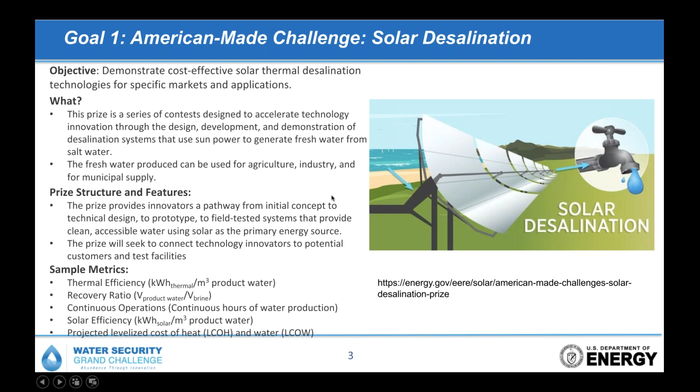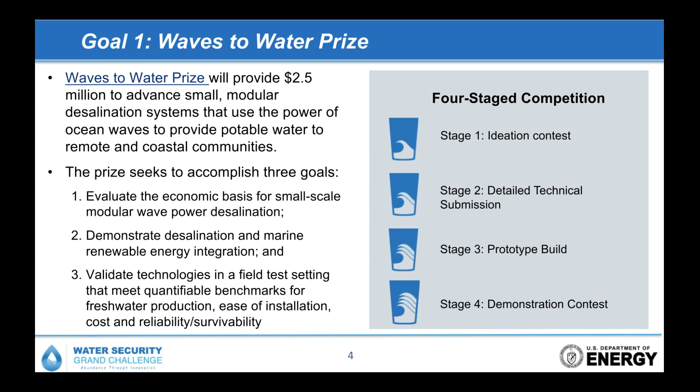Next slide, please. And now I'm going to hand it over to John, who will talk in more detail about Goal 5.

Good morning, everyone. Afternoon and evening, I guess - I think we have participants from all around the globe today. My name is John Carmack. I work with Diana on the Water Security Grand Challenge, and my responsibility is as the lead for Goal 5, which is to deploy small modular energy water systems in cost-effective areas to serve areas where energy and/or clean water is scarce, expensive, or challenging to obtain.

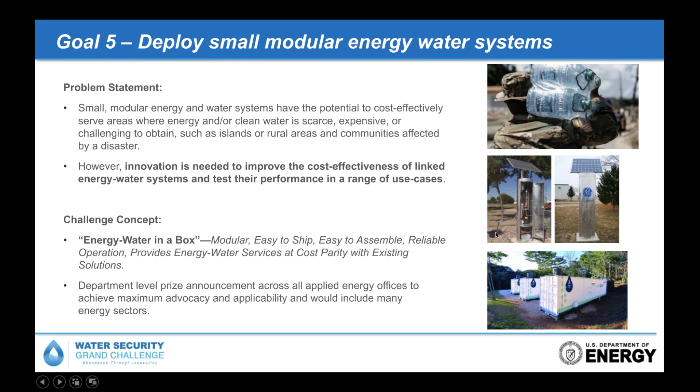In the Department of Energy, we've been trying to focus on how to establish a prize opportunity that is applicable to all energy supply capabilities, as well as applicable to a number of different water purification applications. Next slide, please.

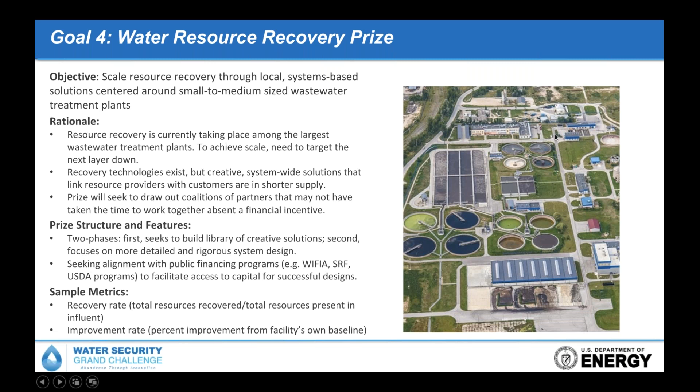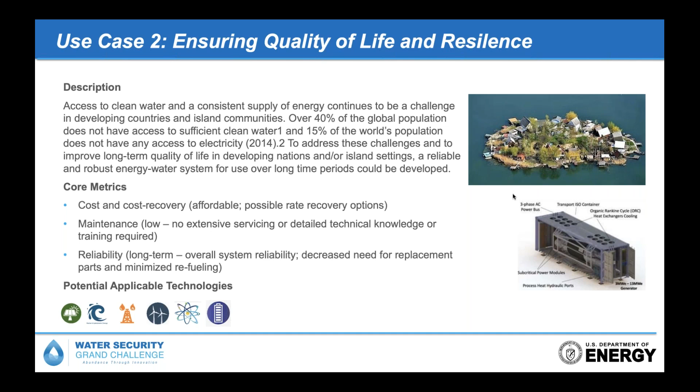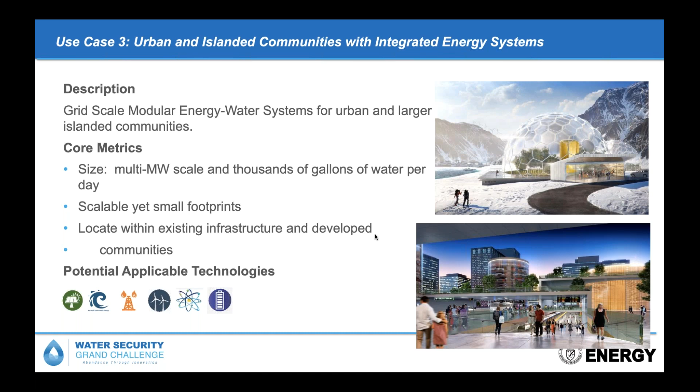We think all 3 of these use cases have definite possibilities for some of the new and advanced nuclear technologies currently under development around the globe. So what we're actually trying to do is identify prize opportunities that cross across all of these use cases, and develop a prize opportunity that breaks down the cost and barriers to having these types of technologies available to communities around the globe.

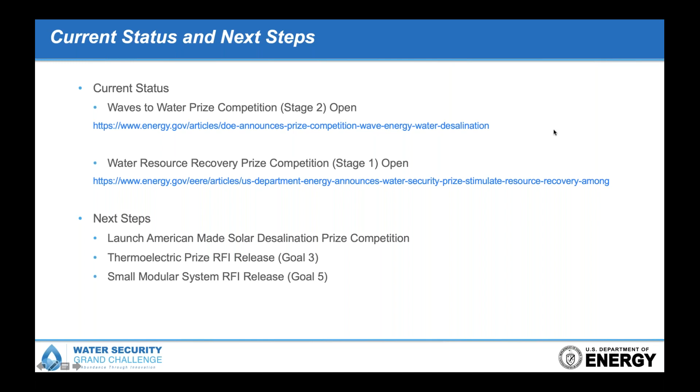I understand that today's theme of the webinar is energy, water nexus, can nuclear technologies build water security? To start with, all I can say is that by this time, we all have come to know that nuclear energy plays a key role towards the supply of clean and green energy, not only as electricity, but also with added value in terms of desalinated water and hydrogen.

BARC India has long-term experience on desalination, with a decade of experience and expertise on nuclear desalination. BARC is also associated with the International Atomic Energy Agency in the field of nuclear desalination and plays an active advisory role. In today's presentation, I will present the role of nuclear energy for desalination and the activities and initiatives undertaken on nuclear desalination in our country, India.

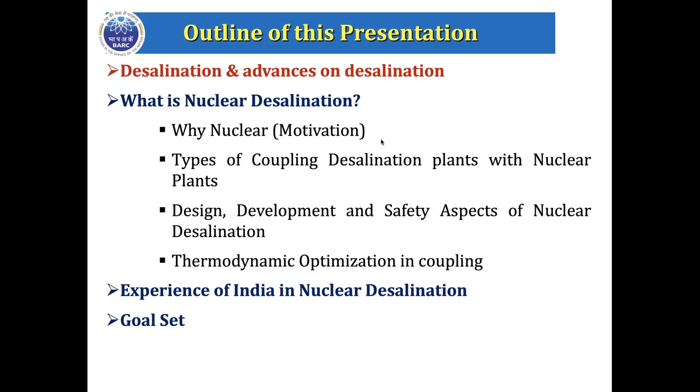Now, when we do nuclear desalination, we need to do some thermodynamic optimization for coupling the system. Then I'll share my experiences of nuclear desalination being carried out in India. And ultimately, we have set some goals for this desalination. Next slide, please.

Now to start with desalination, we understand that there is a solution for this water scarcity. We know desalination is a process which can separate the salt from salt water or saline water. It can produce various quantities and qualities of water, starting from industrial quality water to drinking water. Now to do this desalination, we need some energies, either electrical or thermal, for the present day desalination processes.

This energy can be of various sources, either from nuclear power reactors or thermal power reactors, or maybe from renewable energy sources. Now a desalination system can give very good quality water, but at the same time it rejects very highly concentrated saline water. If it's a thermal desalination plant, it will have some temperature which will pollute the seawater environment, and the concentrated water also will give some ecological imbalances towards the sea.

So we have to see in a holistic manner how we can do the total desalination with the objective of optimization of energy as well as the total system, with various considerations, at a minimum water cost. Next slide, please.

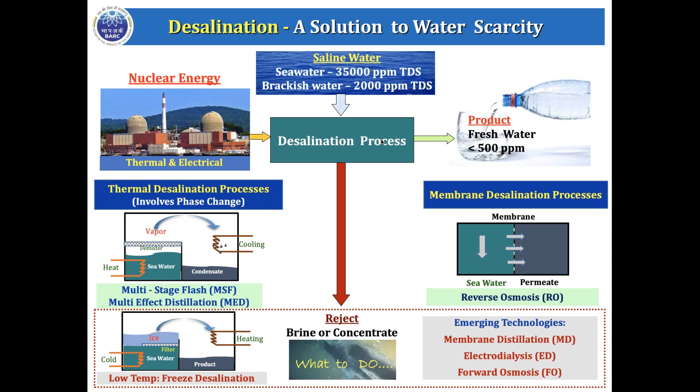Now, present day technologies which are mostly used for desalination are well-established. Those are called multi-stage flash desalination as well as membrane desalination. The desalination technologies have shown continuous progress with respect to their performances, material of construction, as well as efficiencies of individual systems.

For a thermal desalination system, the advances include high gain output ratio, and for a compact system, one should obtain a high heat transfer coefficient. At the same time, overall construction cost should be minimized, so cheaper materials of construction are available nowadays. Sometimes exotic material is used with respect to corrosion, and thin material is used so that overall weight is reduced, and overall cost can be reduced.

Coming to the membrane processes, for the seawater reverse osmosis case, membranes are available with respect to high salt rejection efficiency. Better membranes are available with respect to high chlorine tolerance. Membrane lives are extended, pre-treatment conditions are better, and energy recovery devices are used, which can reduce overall energy consumption.

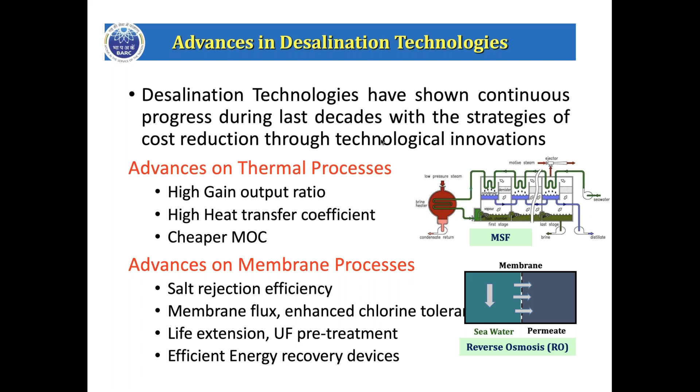Now, why do we go for nuclear energy for desalination? The motivation we got is that our main objective is to reduce overall energy consumption as well as the total cost of production. As you know, desalination is an energy intensive process.

It needs steam or electricity. These are the two forms of energy required for a present day desalination system.

There are other energies available like fossil fuel power reactors and renewable energy sources. But as we know, renewable energy sources are not stable energy sources; they have some limitations which are intermittent in supply. And fossil fuel reserves are limited. We should preserve them for our future use, like transport and petrochemical industries. There are issues with fossil fuel sources, as we all know, such as greenhouse gases which create global warming and do not give carbon-free electricity.

Now, the fossil fuel energy costs are becoming higher and higher because of adding various impacts of other costs, which are quantified in terms of human mortality, morbidity, global warming, and damages to ecosystem.

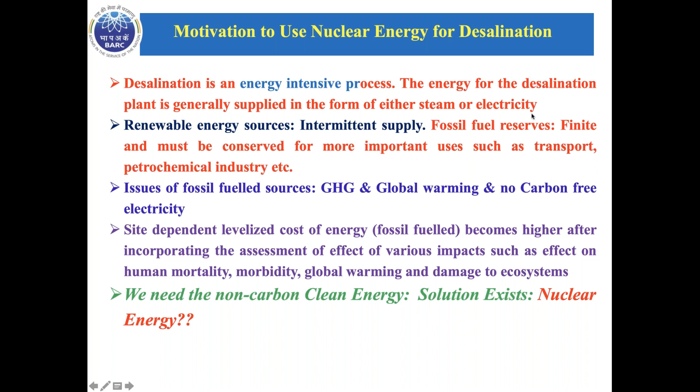Now, nuclear desalination is an application of non-electric nuclear energy application. Now, what is nuclear desalination? It is when a desalination plant is using power from a nuclear power reactor and producing fresh water from seawater.

Why do we go for nuclear desalination? Nuclear desalination can meet the challenges of increasing global demand for water and energy. It can reduce concern about climate change and volatile fossil fuel prices. Nuclear desalination can give security of energy and water supply. Now, how to do it? With the use of steam and electricity.

There are thermal driven processes and membrane driven processes. Electricity driven membrane processes are generally cheaper than thermal processes, but membrane driven processes produce lower quality water and are very sensitive to the quality of feed water given to the system. Thermal desalination plants produce very high pure distilled water, which can also be used for process water and industrial water.

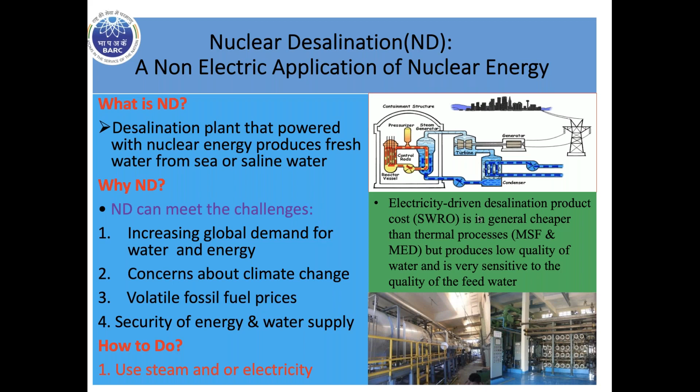Go to the next slide, please.

Now, how to do this nuclear desalination for a heat-driven system? As you all know, a nuclear power plant has some concerns over radioactivity. This can be avoided by giving a coupling barrier in such a way that radioactivity cannot go to the desalination plant side. When the desalination plant uses this energy in the form of steam, there are some problems of activities, mainly tritium, which is a beta active isotope, that can mix with the desalinated water. So there are some ingenious features which are used here.

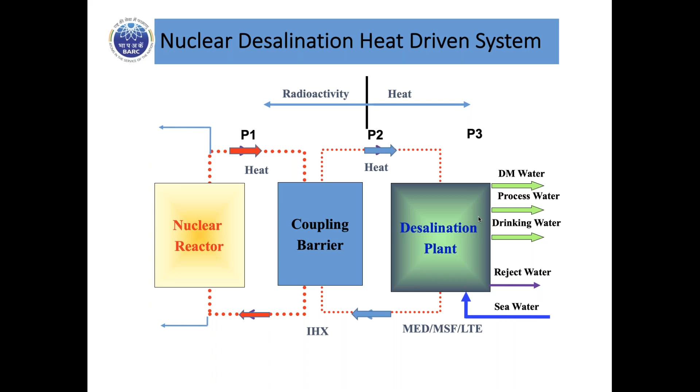Now the candidates for nuclear desalination are thermal driven, well-known multi-stage flash. The multi-stage flash desalination system needs steam at around 3 to 5 bar. Large capacity plants exist which are very much economical and being used all over the world. It has some scaling potential because it operates at a higher temperature, around 90 to 120 degrees centigrade. Steam economy is around 8 to 10 with higher number of stages. Electricity consumption is around 3 to 4 kilowatt hour per meter cube.

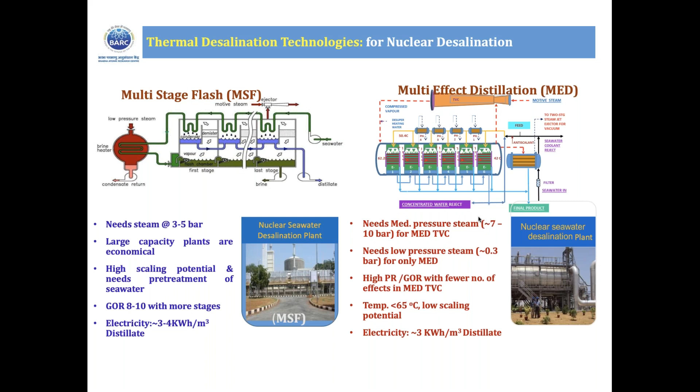Now these are the desalination systems we have to couple with the nuclear system. It's not difficult technically, but some considerations we have to think of, like how to avoid cross-contamination with respect to radioactivity. Also, when the desalination plant is coupled with the nuclear reactor, sometimes the reactor is not in operation, or sometimes the desalination plant is not in operation, so sustainability is sometimes a problem. Other considerations include that reactors are designed for more number of years, but desalination plant systems are not designed for that many years, so we have to think of designing a new in-between system to minimize the impact of thermal desalination systems on the nuclear reactor systems.

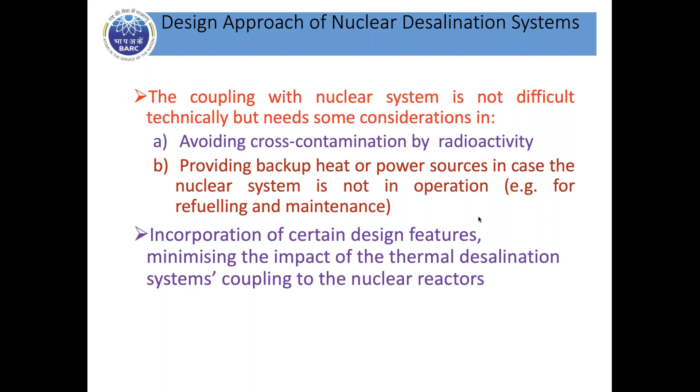If we see present day water-cooled nuclear reactors like PWR and PHWR, the thermal efficiencies are lower compared to fossil fuel plants, around 30 to 35%. This is due to low steam temperature, pressure, and high moisture content, so about 2/3 of the thermal energy is discarded to the water body. If this low level heat is used gainfully for other applications such as desalination, it will improve the overall thermodynamic efficiency, and we can save fossil fuel and reduce greenhouse emissions. Considering the amount of waste heat available in a nuclear power circuit in the form of steam, it handles more steam per unit kilowatt hour of electrical energy production, meaning more waste heat is available, so a nuclear power plant can give a higher amount of desalination.

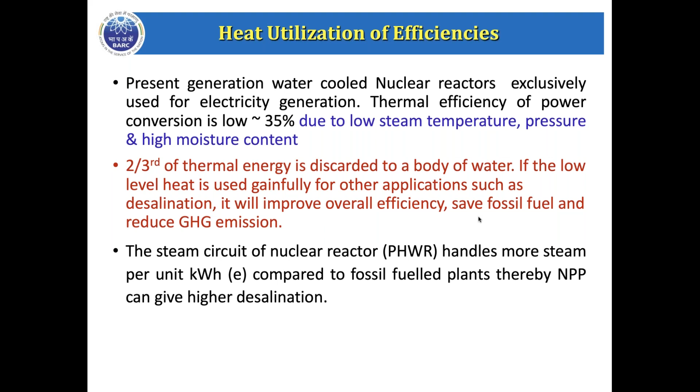Now, worldwide experience of nuclear desalination, before coming back to Indian cases: Japan has several multi-stage flash and MED plants coupled with their PWRs for industrial use. Kazakhstan had one MED plant and MSF plant coupled to fast breeder reactors, though not in operation presently, but had long experience coupling desalination with nuclear reactors. Pakistan is presently operating one MED desalination plant of capacity 4,800 meter cube per day coupled to their Kanupp PHWR. China also has some MED plants coupled to nuclear heating reactors. Argentina has also planned MED and hybrid RO plants for their PWR.

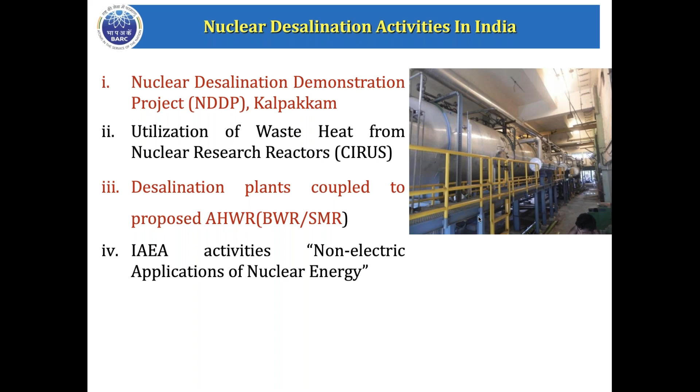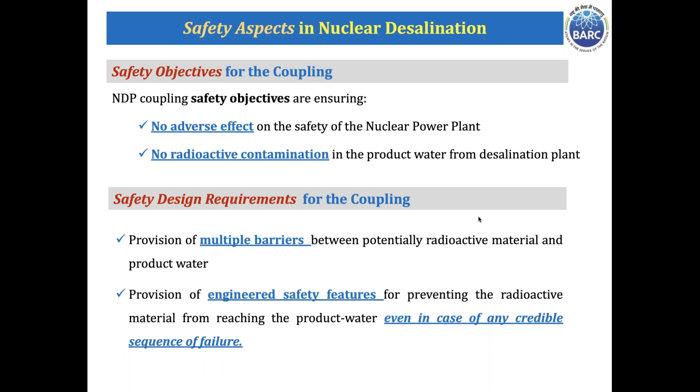How we have done nuclear desalination at our research reactor, Trombay, India. One desalination plant is coupled here, utilizing the waste heat of this nuclear reactor, which is a 40 megawatt thermal research reactor. Since it is not producing nuclear power, all the heat would otherwise go to sea as waste. An isolation heat exchanger is given here, which transfers the heat generated from the primary cooling water circuit to the desalination plant. This desalination plant produces 30 meter cube per day of desalinated water, which is used for the nuclear reactor makeup.

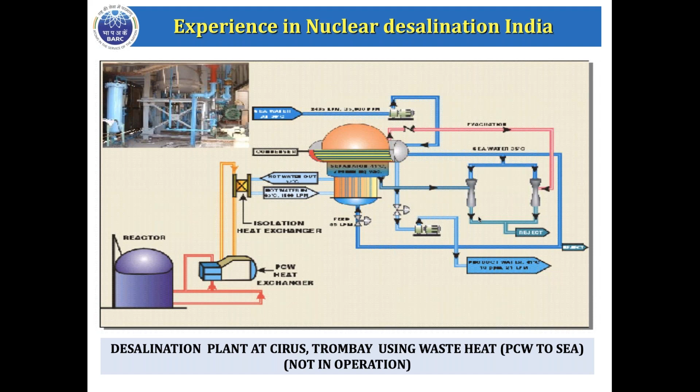We have done some simulation studies, operating the desalination plant at various nuclear stream temperatures coming out from the reactor, starting from 77 degrees centigrade down to 58 degrees centigrade. We have seen that even if hot water is available from the reactor at around 50 degrees centigrade, it can still be used for the desalination system to produce desalinated water. We are continuously measuring radioactivity levels, which are not breaching the barrier. At the isolation heat exchanger, we have kept monitors at various points, and water samples are also sent to the laboratory every hour. These studies have given us enough experience on nuclear desalination, particularly at smaller scale.

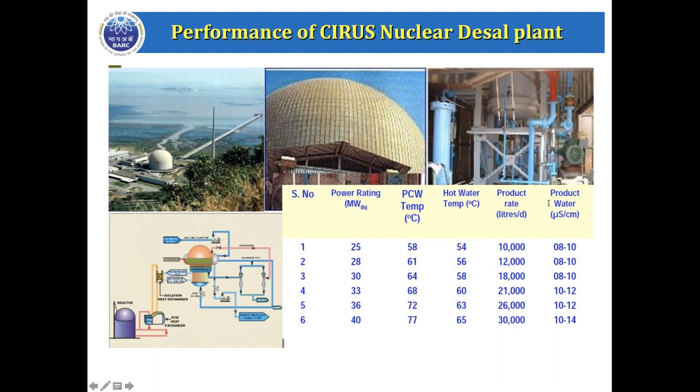Coming to our Kalpakkam nuclear desalination plant, this is a hybrid nuclear desalination plant consisting of a multi-stage flash plant and a reverse osmosis plant. The multi-stage flash desalination plant has a capacity of 4.5 million liters per day, and our reverse osmosis plant has 1.8 million liters per day. We chose this hybrid desalination system with the objective that when the nuclear reactor is not in operation, at least the RO plant can give desalinated water to the public. The MSF plant gives pure quality distillate water; part of this water goes back to the reactor, and the remaining water, after post-treatment mixed with the reverse osmosis plant output, goes for drinking.

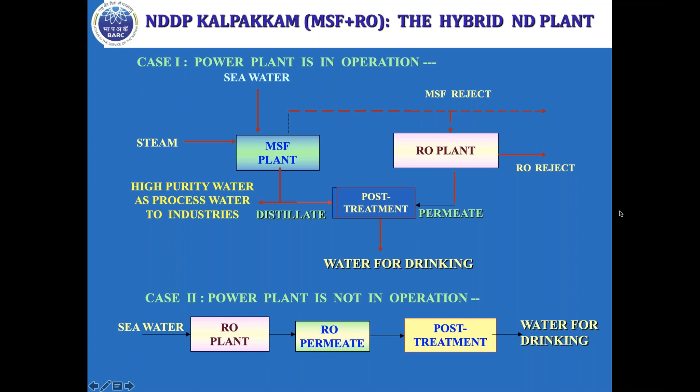In this hybrid system, the hot water coming out from the multi-stage desalination plant coolant system goes to the seawater reverse osmosis system. This increases the flux of the reverse osmosis plant. Of course, we get some deteriorated quality, but the overall product gives WHO quality water. This plant has been operating since 2008, and with around 12 years of experience, we have not encountered any radioactivity in our water system. We continuously measure alpha, beta, and tritium activity levels in the intermediate circuits as well as the water circuits. To gain experience for demonstration, we carry out various experiments on this system.

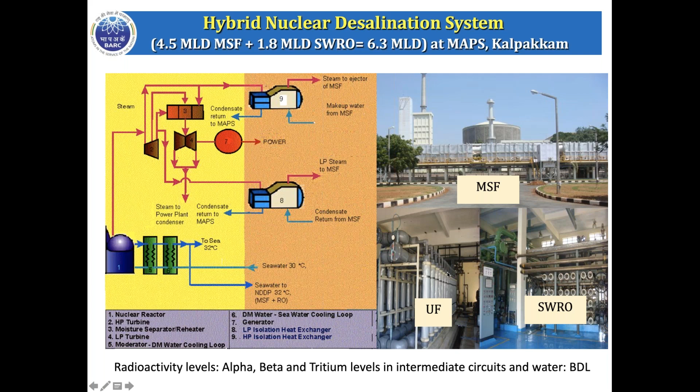We have some other experimental setups giving simulated results of waste heat utilization from various power plants. In our country, we have many pressurized heavy water nuclear reactors, and as you know, the final condenser's remaining heat goes back to the sea as waste heat. When the feed temperature is around 30 degrees centigrade, the waste coolant water goes out at around 35 to 40 degrees centigrade, so lots of waste heat is available. Our department has developed technologies based on thermal processes, such as low temperature desalination systems, which can utilize the waste heat of these nuclear reactors.

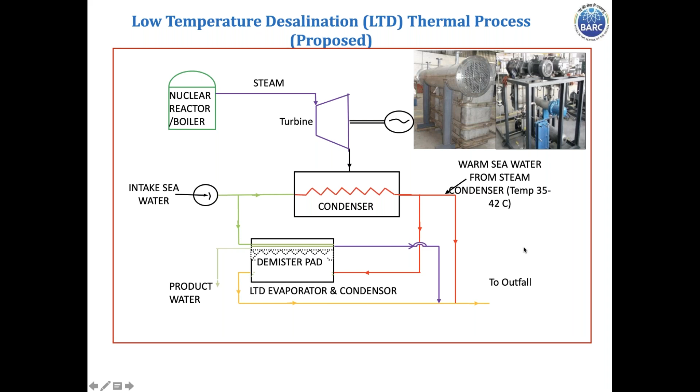Our country is planning to set up 700 megawatt PHWRs. The department has given the mandate that all nuclear reactors will have small desalination plants which will provide makeup water for the reactor. Next slide, please.

In the coming years, we are having a proposal of an advanced heavy water reactor, which is heavy water moderated, but a boiling water reactor. Here also we have planned for a 2.4 MLD MED desalination plant. From the nuclear reactor, the primary heat transfer circuit, there is also around 5 megawatt waste heat available. There also we have planned for an MED desalination system, which is presently in the execution stage.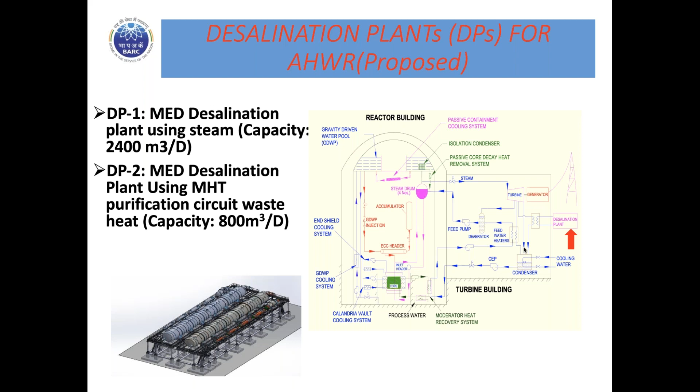So this is the scheme of how we are giving multiple barriers, generating non-nuclear, non-radioactive steam for the desalination system. You can see here on the right side the desalination plant, and there is a separation between the nuclear side and the desalination side.

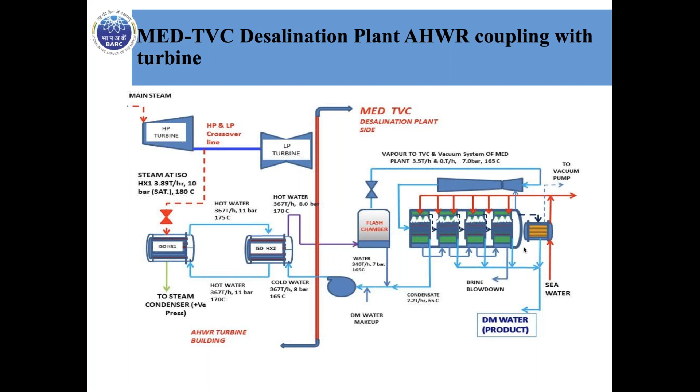When we are doing this desalination, we do activities on thermodynamic optimization, to determine how to extract steam at what point, which will give maximum production using the lowest energy. We do modeling work on this, using the thermodynamic optimization program of IAEA, which gives various sensitivity analyses of how heat extraction and power production can be analyzed in an Excel sheet manner. Ultimately we have to calculate the total penalty from doing this desalination. The nuclear reactor loses some power, so our objective should be a low power, high desalination system.

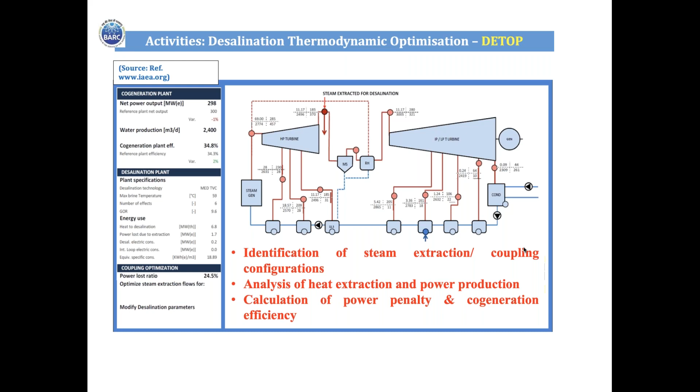We have analyzed various coupling systems connecting with the nuclear reactor. With one SMR, we have considered the AHWR, with capacity of 920 megawatt, 300 electrical energy. We have simulated various desalination systems: SWRO, MED, and combined hybrid systems like MED-TVC, meaning thermo vapor compression system. We have analyzed the system, and various coupling systems have been shown at various cost figures, coupling with the reactor.

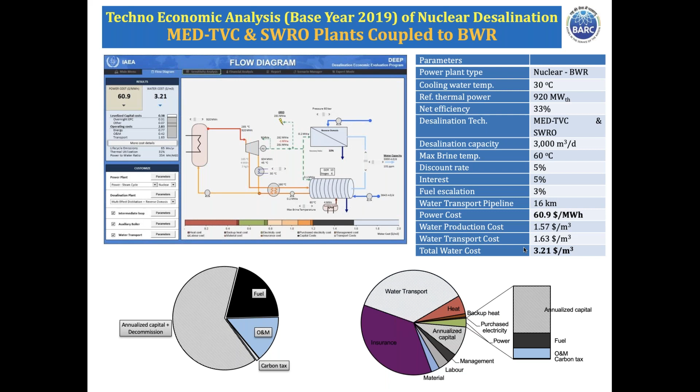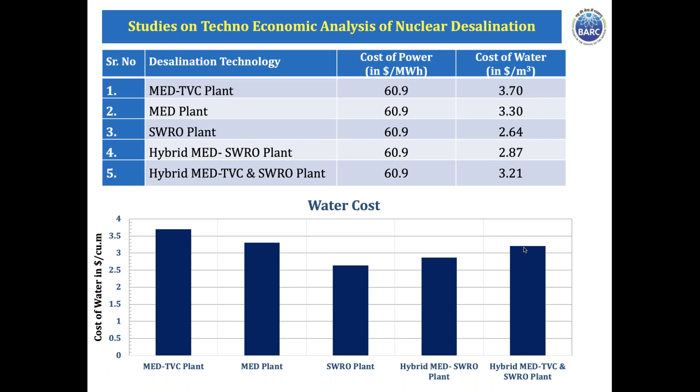This shows the various cost figures of desalination systems coupled with the SMR: SWRO system, MED system, MED-TVC, and hybrid combining both technologies. It shows that the SWRO plant gives the lowest cost of water in terms of dollars per meter cube, around 2.64, for a capacity we have considered here of 3,000 meter cube per day. Of course, the cost can be reduced by scaling up in future terms. When the hybrid system comes, it has been shown that the hybrid MED-SWRO plant will give both qualities of water, for industrial use as well as for drinking.

Now, what are the challenges we face for nuclear desalination if we apply it for public utilities, utilizing nuclear power and producing desalinated water? The challenges are many. The location of a country suffering from scarcity of water, but nuclear power plants are not located there, so co-location is a problem. If the nuclear power plant is too far, water transport cost is huge, so the total desalination system fails. So co-location is a requirement, while also minimizing the water cost. With the nuclear reactor involved, financing, cost, nuclear liability, safeguards, and security all must be considered. There are operational challenges too, with two coupled systems of different lifetimes, and management must look in different directions for this cogeneration system. So economics plays a role, and of course public perception and socio-environmental aspects must be considered.

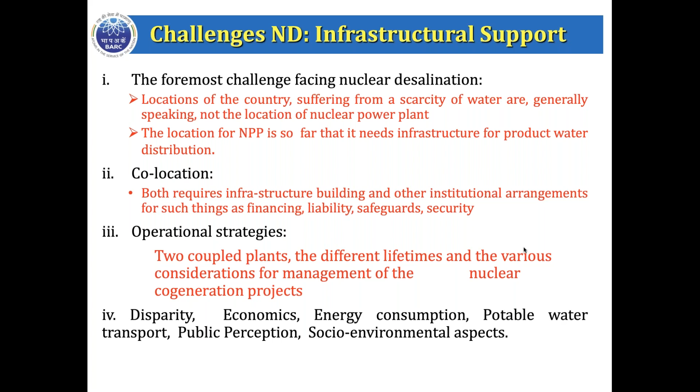Now, with nuclear desalination, when giving water to the public, the concern is radioactivity, as I said earlier, and everybody will say 'don't put the desalination plant in my backyard.' So these are fears we need to alleviate. Another concern is radioactive contamination. We have to give confidence to the public that the product is radioactive free, and by scaling it up and disseminating a number of desalination plants across the country, public fear will reduce and it will not give any adverse impact to the countrymen. Even NGOs sometimes give the wrong direction towards nuclear.

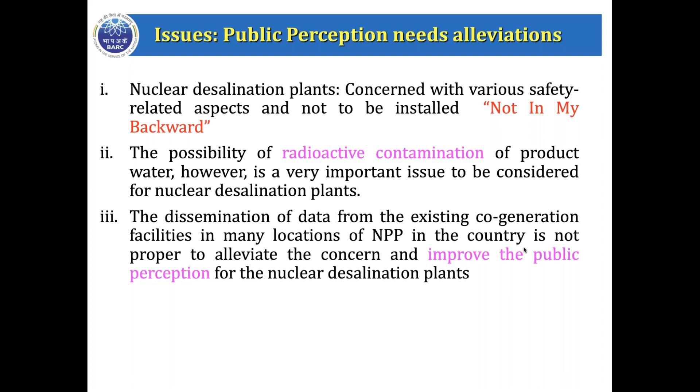Coming to the conclusion, by setting up nuclear desalination plants in our country at various locations, we have gained enormous confidence that nuclear desalination is not only technically feasible, but also feasible in terms of quality and quantity. The country needs desalination and energy, so nuclear desalination will play a major role for not only energy security but also water security. There are many challenges for this desalination system, but based on present-day knowledge, we can say that nuclear desalination technology is well understood, feasible, and can solve water scarcity issues.

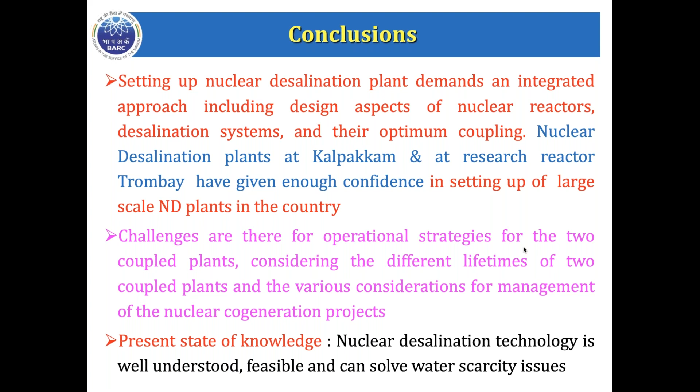So we have set a goal. The mandate given to us by our department is to go for a hybrid system which will give sustainable production of energy in terms of electric power, hydrogen, as well as fresh water. Two energy systems are being used: one is solar energy, another is nuclear energy. By combining these two energies, we'll get three products: electric power, hydrogen, and desalination. So flexible energy systems have been considered for our next goal.

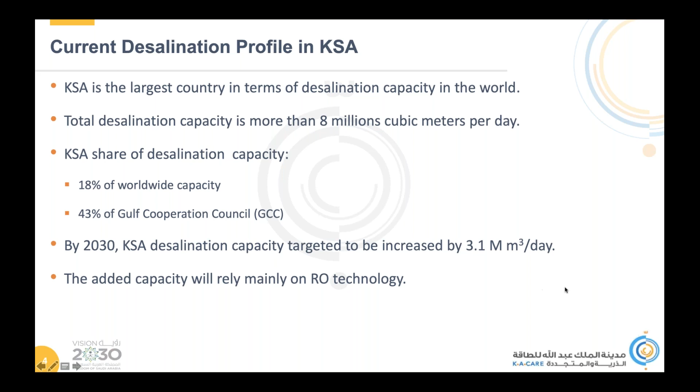As you know, desalination reverse osmosis has much lower energy than thermal, like MSF or MED, and it is about one-quarter of the required energy per cubic meter. Thermal desalination uses about 12 to 13 kilowatt hours per cubic meter, while reverse osmosis is about 3 to 4 kilowatt hours per cubic meter.

So in Saudi Arabia, 20% of the total domestic energy consumption goes to desalination or water production. As I mentioned, if we take 8 million cubic meters per day and translate it into energy requirement, that's about 60 gigawatt hours per day, which is a lot of energy being used. This is of strategic importance, as I said at the beginning.

So we must look at how to minimize the requirement of energy and also the impact on the environment. This is a serious issue that we're all working on. K.A.CARE is one part of many entities that work on this in Saudi Arabia.

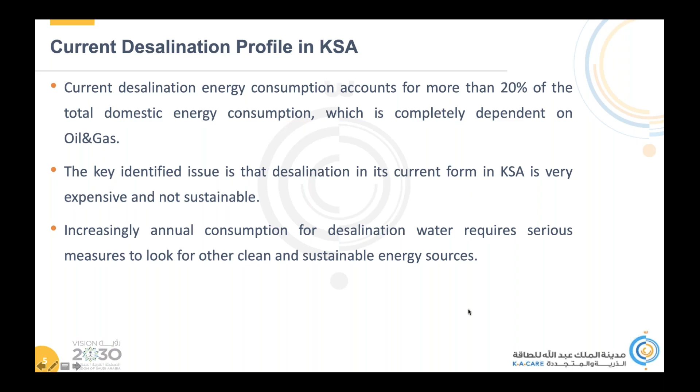If you go to the next slide, we will look at different projects that we used in the past. Some of them are working right now. We have what is called Al Khafji, in the top northeast of Saudi Arabia, which uses photovoltaic. That photovoltaic is fed into a reverse osmosis plant producing about 60,000 cubic meters per day.

The economics there are not very favorable for the production of PV, for many reasons, if we compare it to thermal plants. But it is a benchmark that we have set, and we believe that in future work we can beat that, improving the economics by about 50%.

We have another project, not yet completed, using CSP parabolic trough to generate steam, and that steam goes to an existing MED plant. The MED plant receives steam from a diesel boiler. We're removing that diesel boiler and replacing it with a field of CSP. We have the capacity of about 9,000 cubic meters per day to replace, so we will have a solar utilization of 50%.

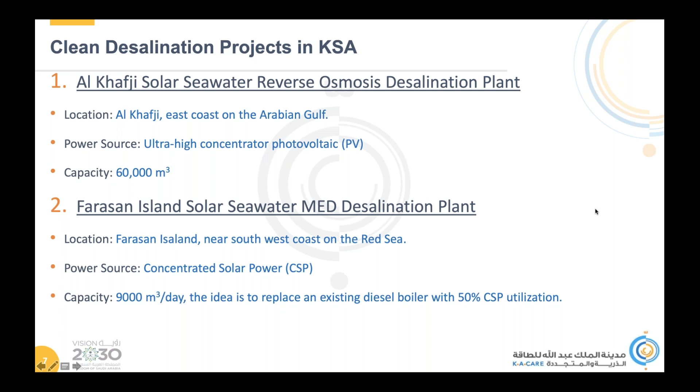The third project, announced recently from NEOM, a future city being built in the west of Saudi Arabia, uses a really innovative solution.

It basically draws water from the sea, and whilst it's moving in a channel covered with concentrated glass, it heats it up until it reaches a dome where the vapor increases in pressure, then the vapor condenses into clean, desalinated water. So these are three of the projects we already have in Saudi Arabia.

I'd like to go to the third part of my presentation where I show you some of the ideas we're working on with different partners.

The goal is really to economically assess and compare nuclear desalination with other sources of energy. These sources are CSP, natural gas and crude, and also coupling that source of energy to different power plants or different modes of desalination, such as MSF, MED, reverse osmosis. It's also very important to compare hybrid systems, such as MSF with RO or MED with RO.

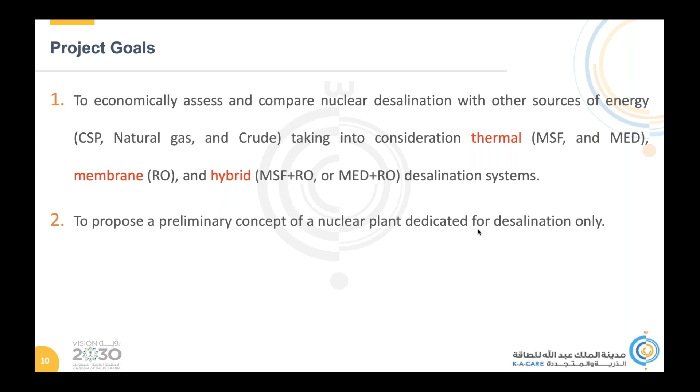These are some of the samples we're working on for energy resources, where we make steam, then from steam we make MSF, MED, then clean water. Or on the other route, we generate electricity, then reverse osmosis, then water.

I should mention that for these energy sources, we're not just looking at what is typically available. For example, in nuclear, we're looking at BWRs and other mature technologies for producing power, but also at a nuclear reactor designed specifically for water desalination. As you know, the design of a power plant is very different from one for nuclear desalination. Same thing with CSP.

If you have a CSP designed for power, it means the aperture of the parabolic has to be, for example, 6 meters opening, with a very highly polished evacuated tube, so you can reach 450 degrees centigrade for power. But if you design it for water desalination, you don't need those specs, so you can go to 110 degrees, which is enough for water desalination.

So we're not just looking at off-the-shelf existing designs. We're also looking at a potential design dedicated for nuclear desalination. We believe it's very important to develop this, because with that dedication, that's how you can achieve economics and really have this widespread all over the world.

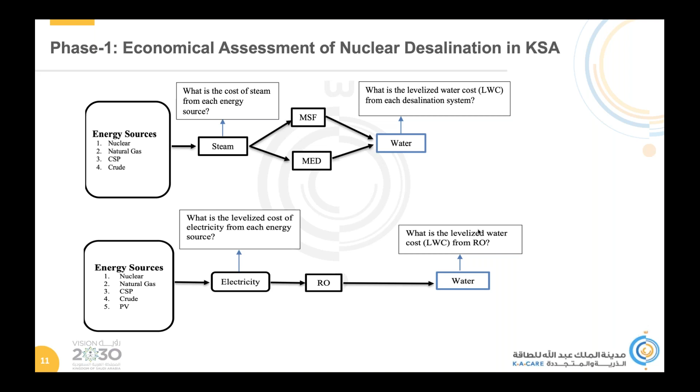But we need to be very selective on the energy source and the utilization. We have about 40 systems that we're looking at right now with the economics and the designs. We'll be more than happy to work with anybody interested to share some of this data, and we have better experience and benchmarks with others.

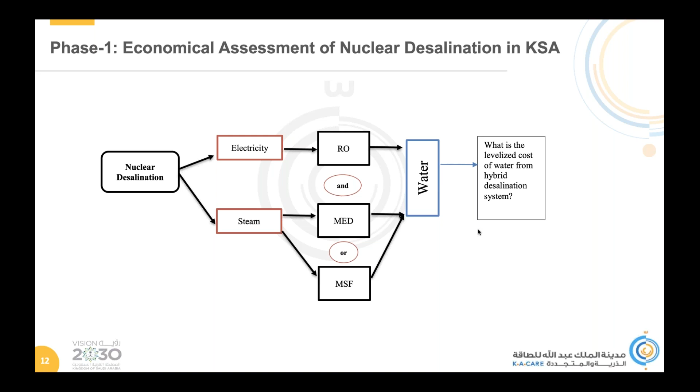Next slide, please. So in phase 2 of this conceptual design, it's really to provide a feasibility study for K.A.CARE, which is the organization which stands for King Abdullah City for Atomic and Renewable Energy, with the Korean research institutions. So we look at the dedicated design for the nuclear plant and also the different economics as we move forward.

The design of the nuclear desalination plant will focus on improving economic efficiency and, of course, safety. On safety, a lot of discussion is about putting in a third loop, making sure that the radioactive material has no effect. But of course, that adds cost. So we're always looking at being cost or economics conscious, but safety is a first priority, and also the environment. So it all has to be looked at at the same time.

We believe that in order to have an impact on this high volume of millions of cubic meters per day, nuclear will make an impact. However, is nuclear going to feed power to the grid, and then we take it to a reverse osmosis plant, or direct thermal? This is yet to be seen in an environment like the Middle East.

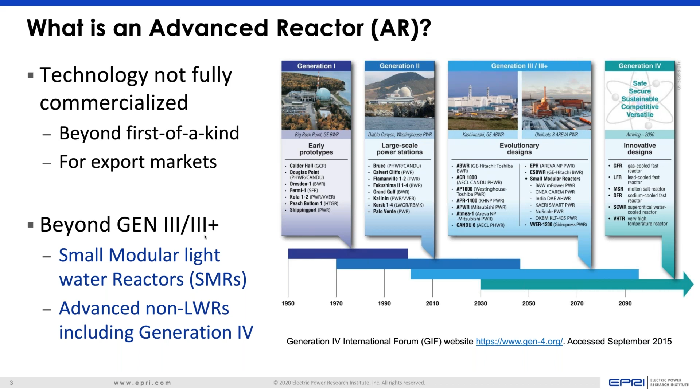So what you can see here is the expanded mission and options around nuclear power, which a lot of our fellow panelists have already discussed in great detail. I'll just highlight a couple of key points we agree with. Obviously, with existing style and design, there's a clear opportunity around thermal desalination, using steam generated by the reactor and also using waste heat to supplement and improve efficiency. But as we start to think about Gen 4 reactors and next generation technologies, it opens up a number of opportunities, specifically in this example showing where we see an optimal use for temperature and new steam production.

From a water perspective, high temperature steam electrolysis comes to mind, which is related to hydrogen. When we think about where hydrogen production could come from, we're talking about water in the context of electrolysis. So where does that water come from? What do we do with the byproducts? Where do you co-locate these facilities? As mentioned by other panelists, there's a lot of impact both socially and economically into some of these decisions being made.

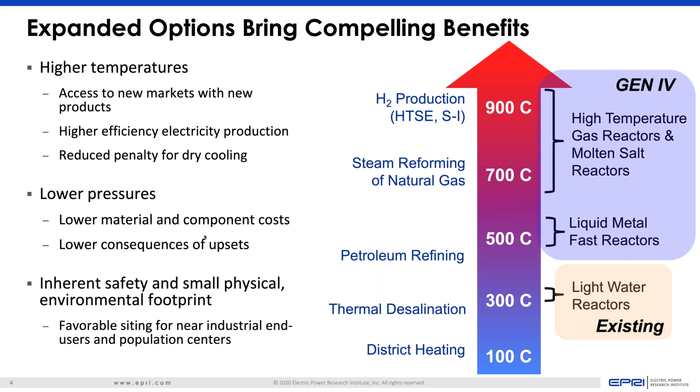When we project into the future and imagine this future with new nuclear, we see that the benefits and opportunities exist for making nuclear a strong backbone for a broader economy. This economy can be based on electricity as it is today, but also expands into hydrogen, water, and potentially others as we think about transportation and other technologies which could be offshoots of the hydrogen economy.

As a number of speakers have pointed out in the overall panel discussion today, water availability is a critical component when considering any of these opportunities, both from a generation perspective, because we rely on a lot of water to facilitate cooling and operations at a nuclear facility. We anticipate that could continue into the future with existing and new technologies. There's also the dynamics of needing clean water in places where you also need energy and electricity, and with changing profiles and operating conditions based on demand, having multiple options will become critical. But water will continue to be a critical resource need for the population worldwide moving forward.

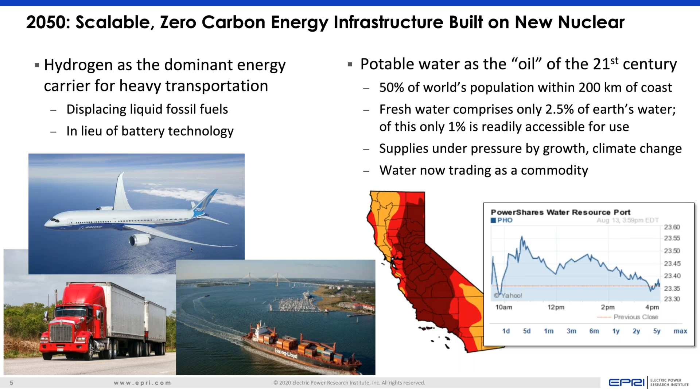Our vision around advanced nuclear research is that these technologies are scalable, that they can be dispatchable, and that they achieve the zero carbon energy generation being discussed and used to drive forward the future and economies we wish to achieve. We've taken big steps to incorporate this vision into our research portfolio. Those familiar with EPRI will start to see even more of these discussions come to the forefront as we anticipate what the future into 2030, 2050 and beyond looks like from nuclear's perspective, and all the changing missions and opportunities that come along with that.

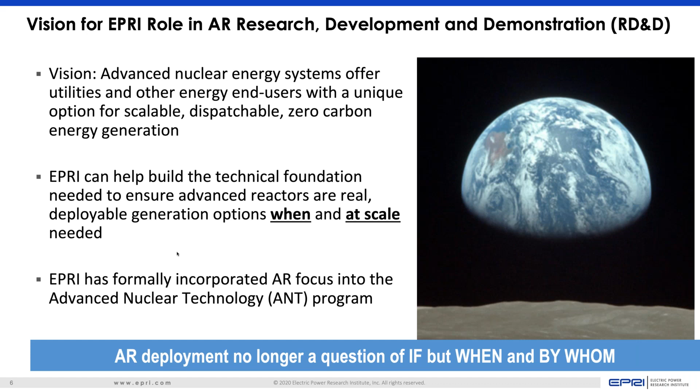Our approach is twofold, both strategic and tactical. In the strategic area, we're looking at the economics and markets, realizing there are key drivers we have to be mindful of in pursuing research, technologies, and innovation. On the tactical side, we're heavily involved in evaluating the technologies and helping to define what it means to identify, deploy, and establish these as the technologies of the future. That goes with risk, safety, economics, and all the things that come with defining that future state. We've got a couple of results highlighted here below.

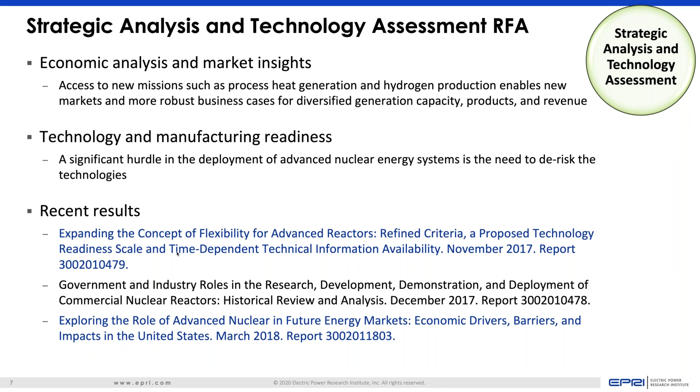I'd encourage you to visit our website. You can most easily type in the report number and begin to access some of the information.

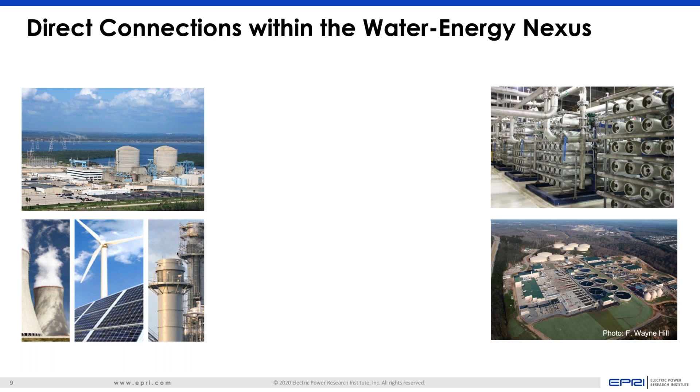Now I'm going to switch into the portfolio of water, which certainly incorporates the opportunity for a future nuclear portfolio, along with other aspects. As mentioned by my other fellow panelists, there's plenty of direct connections within the water-energy nexus in terms of electric generation and water needs. So we think about desalination, municipal water makeup. Those direct connections could be steam - we've heard a lot about thermal energy usage, electricity as part of the grid, or a direct connection to either desalination or water treatment. And then also the integrated technology combinations that come with siting, for example, desalination with power generation, so you have infrastructure like cooling which plays a critical part.

But another piece of the story is the reverse - how we use water systems to improve the resiliency and reliability of the energy side. We think about things like demand response, where we use our water systems to balance the various missions and load profiles that come from energy utilization, specifically electricity, but it could also be thermal energy, steam, and other infrastructure. We think about energy efficiency. As many have mentioned, our demand and needs for clean water are only increasing.

It will be critical that the efficiency of these water systems, both desalination, water movement, and various uses beyond drinking water applications into agriculture and other industrial uses, that those technologies are efficient so that we can better maximize energy and see reductions in greenhouse gas emissions, CO2 emissions, and other environmental constraints which might become more prevalent as we need to use more energy for clean water. The goal would be to become more efficient in that energy utilization.

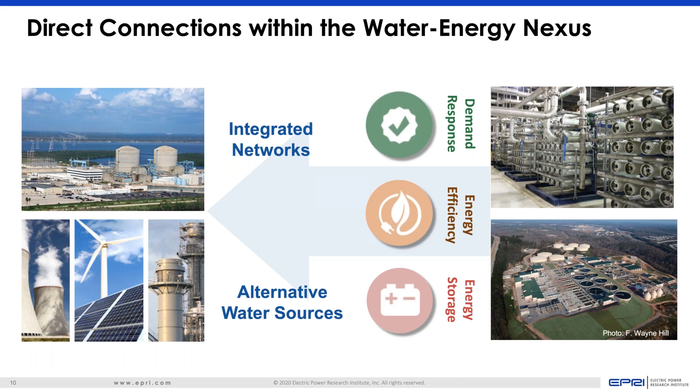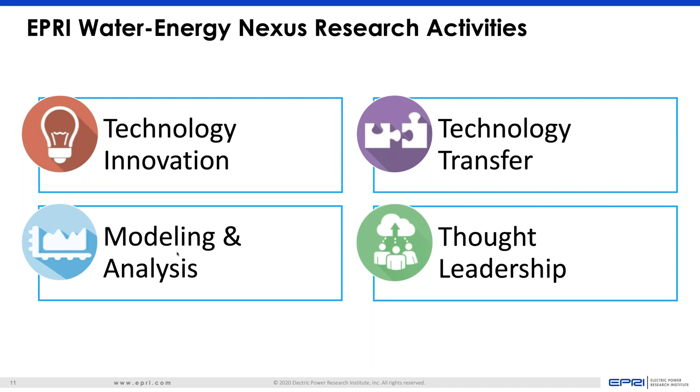I'll speak briefly about a couple examples of how we've organized our research activities around the energy-water nexus. We focused on, at a high level, technology innovation, where we're looking at new technologies and working with other researchers or companies to bring those ideas into the commercial space. Also technology transfer, recognizing that there are water systems and energy systems deployed in other applications, and how we match those up for the benefit of all. Also modeling and analysis, because it becomes very critical to understand the techno-economic components of very dynamic and challenging integrated systems. But then also thought leadership, where we speak to pushing the boundaries, thinking beyond today's mindset, and how we continue to explore and push into the future.

A few examples. In terms of technology innovation, we have a research portfolio dedicated to the water used to cool these systems, particularly in power generation. For thermoelectric power generation, water is a critical component, and there's a lot of water use in the power generation sector, primarily for cooling. So we're looking at innovative ways to reduce that dependence on fresh water, such as air-cooled systems or hybrid systems, and also new technologies which allow us to store energy through the cooling concept and technology as well.

In terms of technology transfer, I don't think I have to go into a lot of detail, because we've heard this from a couple of panelists. An example here in the US, not far from where I sit, is Tampa Bay, Florida, where you have a power plant integrated with desalination. We've heard other panelists speak about this in the Middle East, India, and other places across the world. What we find is that once you make these connections, the integrated components that have to touch each other to enable that partnership become a source for potential concerns or opportunities, so we can look at improving the efficiency of those connections as well.

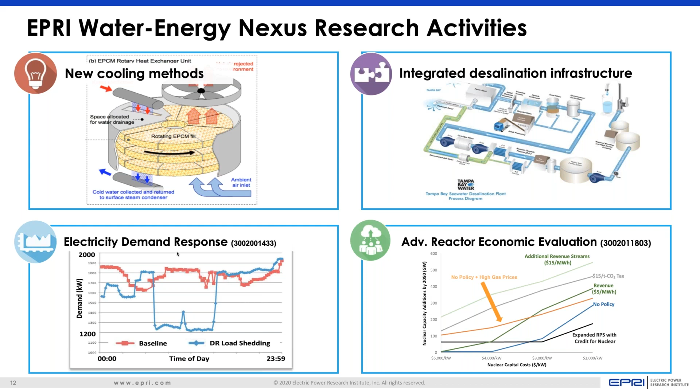So with that, I'd like to turn it back over to our host. And again, thank you for the opportunity to speak.